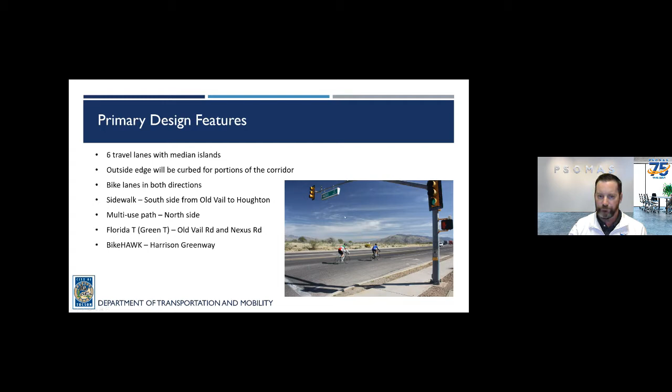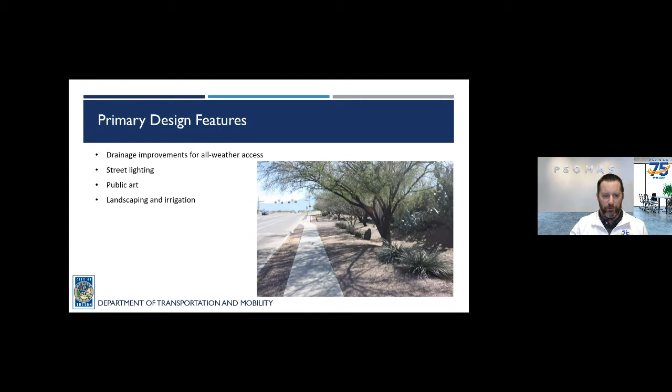We'll include Florida T intersections at Old Vail Road and Nexus Road, and I'll go into more detail on those shortly. There's an existing BikeHAWK at the Harrison Greenway that will be maintained, so there will continue to be a BikeHAWK there in the future. We'll be doing drainage improvements to make sure everyone has all-weather access, and continuous street lighting will be included throughout the corridor. As mentioned, there will be some public art, which we'll talk about shortly, and also landscaping and irrigation.

Here's the Florida T, also known as a green T intersection. The idea behind a Florida T intersection is that, in this case, westbound traffic going from Houghton to Kolb Road would not need to stop for a signal; they would continue through. The only time they would need to stop is if a pedestrian was crossing the road, triggering a signal. Otherwise that direction of travel would be continuous.

Eastbound traffic would have to stop for Old Vail traffic to make left turns out, as well as for Valencia Road traffic to make left turns into Old Vail. However, having the free flow for westbound traffic really improves the operations of the overall intersection. There will be a signal at this intersection as well, including left turn arrows in all directions, as well as a right turn arrow for Old Vail Road traffic going north to eastbound.

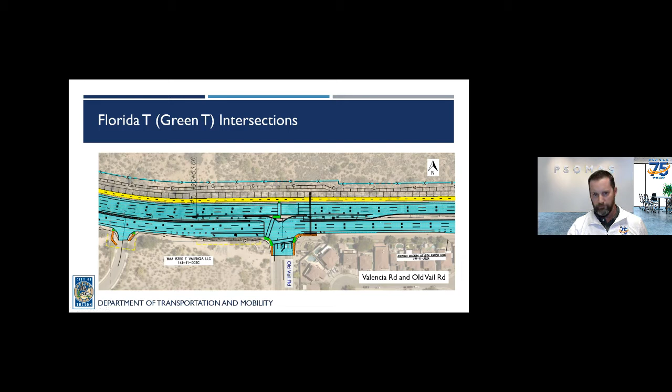Nexus is very similar. Again, westbound traffic would be able to go through without having to stop for a signal unless a pedestrian triggers it. These work basically because there's no opposing leg, no leg on the north side of the intersection. That's why Florida T's work rather well in these situations.

Same situation, there will be left turn arrows in each direction at the signal, as well as a right turn arrow for northbound traffic.

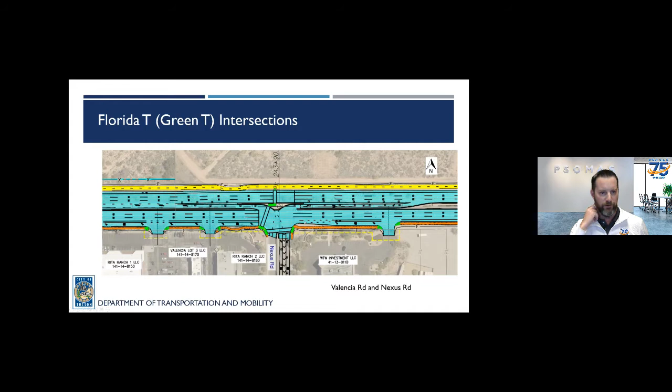We talked a little bit about two-stage lefts last time in December, and we've decided to implement a two-stage left at James Dean, right over here. That allows traffic coming out and trying to turn left onto Valencia to have a staging area where they're out of traffic and able to merge into Valencia when there's an opening.

It's kind of similar to a Florida T, but not signalized or anything like that. It really just gives the driver a place to stage while they wait for that opening to get into traffic.

At Bullrider, we also included what's known as a loon, which allows large vehicles like semi trailer trucks to make a U-turn. This is where they'd be able to do that, since at the Florida T intersections they would not be able to make a U-turn there because of the nature of that style of intersection.

So we have one of these for eastbound traffic, and then we have one for westbound traffic that is west of Old Vail Road.

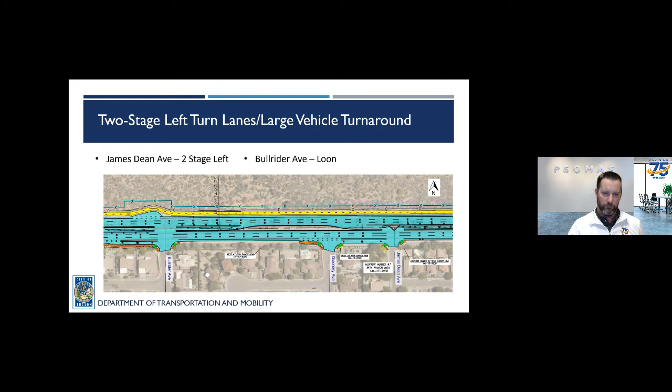This is the landscape concept. Things to note here: the existing landscape on the south side of the road, up against the Rita Ranch development, it's our intent to have as much of that landscaping remain in place as possible.

It's our intent to leave the existing sidewalk in place as much as possible, as well as the existing curb. Everything north of there would be reconstructed and widened. We're doing that because there's some really nice vegetation already out there, and also to save money on the project.

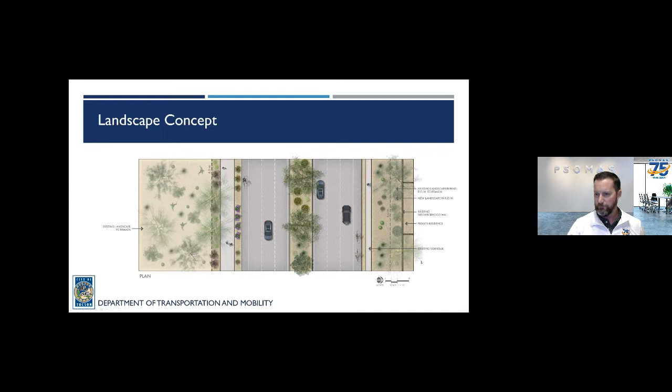And this is what it looks like in plan view. As you can see, we have 6 travel lanes at 11 feet, with an 11-foot travel lane and 6-foot bike lane. There's the existing sidewalk I mentioned, a 12-foot multi-use path on the north side, as well as 11-foot travel lanes and a 6-foot bike lane on the north side as well.

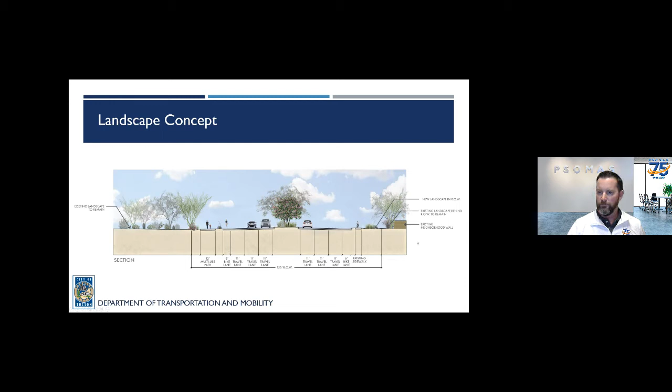And I'm going to turn it over to Woods Fairchild with the Arts Foundation for Tucson and Southern Arizona, who's going to talk a little bit about the process for public art.

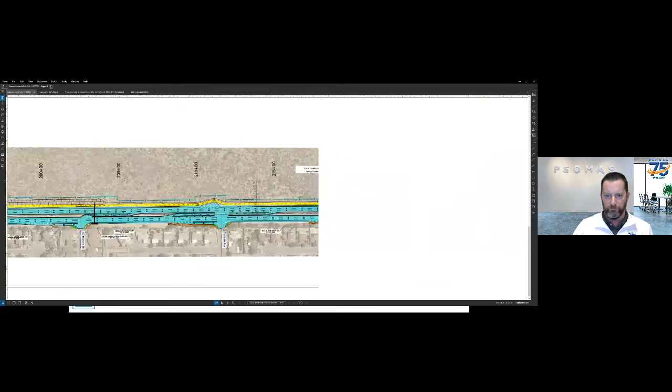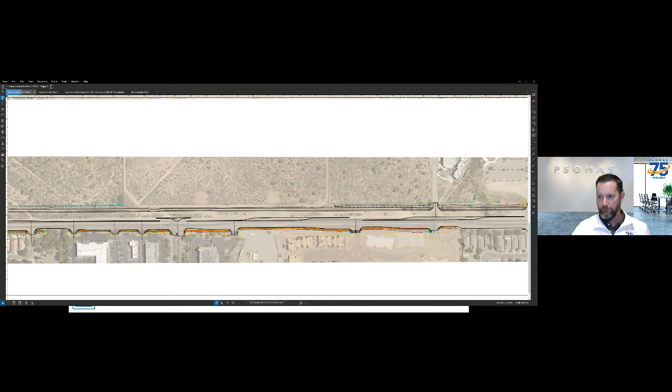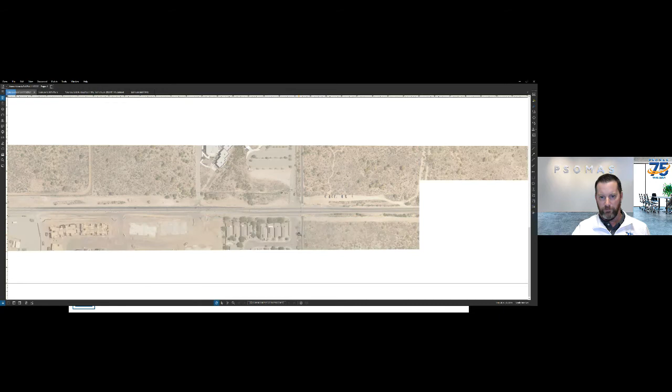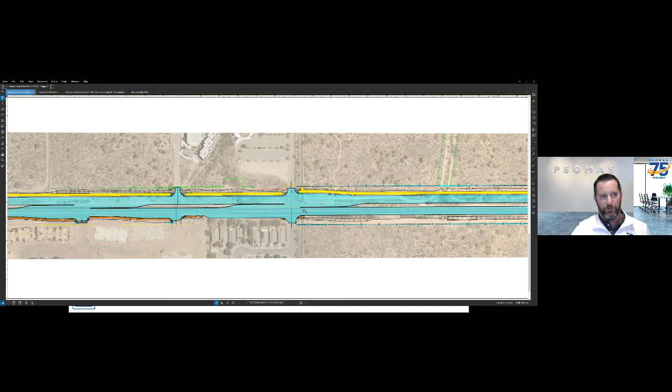Let me share the roll plot and I'll go over to Frost. Takes a little while to update here, sorry, it's been slower than usual. I guess while that's loading up, the answer is yes, there will be a median opening at Frost to be able to turn left out. There will also be a left turn lane going into Frost there.

Here's the Harrison Greenway going north-south. The existing bike hawk is right in this area. Here's Frost Drive, and as mentioned, you will be able to make a left out of Frost Drive to go westbound on Valencia. You'll also be able to make a left into Frost Drive.

There's a lot of trucks now, so the noise level is loud and will only grow louder. Is something going to be done to help the homes on Valencia? We are doing a noise study. The measurements have been taken; however, the noise study is not complete yet, and we have not seen a draft of that yet. Once we do, that information will be shared, but at this point we don't have the results of the noise study yet.

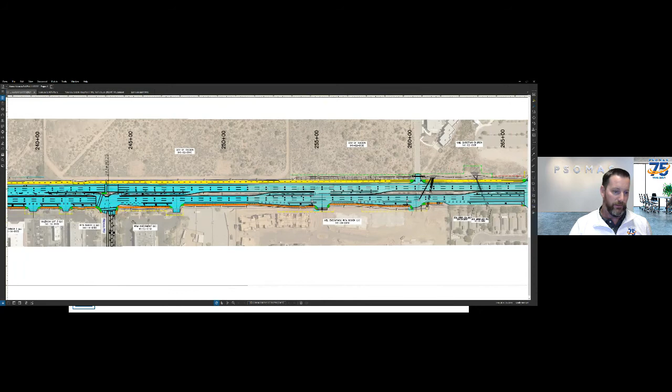The flyer noted improved asphalt surface. Will this result in lower road noise for residents? We will be using an asphalt called terminal blend. It has some rubber in it, which does tend to help with noise a bit. It is not the older rubberized asphalt that was used for a while, because that proved to not have the longevity and required a lot more maintenance. So that is not the case, but it is a terminal blend, which does include a little bit of rubber that helps a little bit with noise.

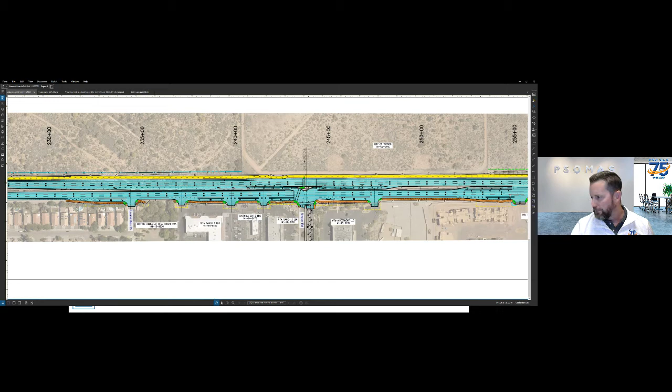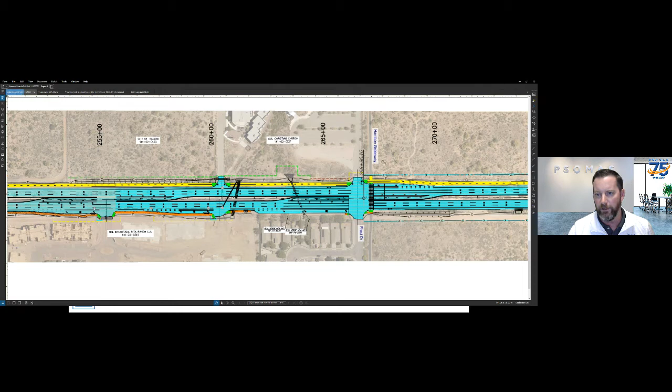Next question, also in regards to Vail Christian Church: I understand that additional frontage will be utilized by the new road. Will safe access be provided for users to pull off the road and unlock gates safely? What type of vehicle size are you planning for this effort? We did measure this, and I believe we still had at least 20 feet between the edge of the road and the gates, which would be adequate for a passenger vehicle. Hopefully that answers the question.

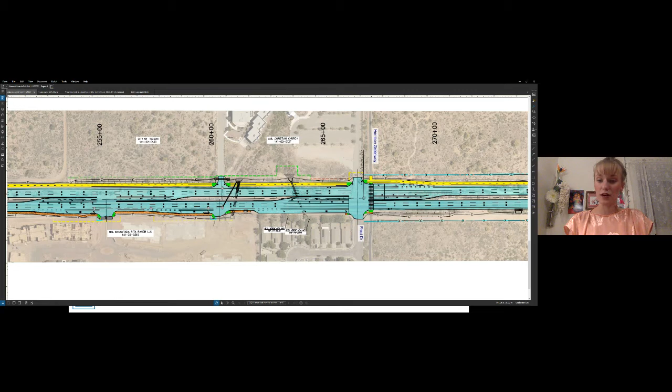Thank you, Jan, for your input and for asking that question. In terms of selecting the committee, my guess would be early 2022, within the first couple of months, as the call will go live first. It will then be open for a full month. Processing applications and getting the panel assembled will be next, along with outreach. So, early 2022. Jan, feel free to reach out, I've put my email in the chat. I'd love to hear about your connection to the area, whether you'd like to serve, or if you have others in mind.

All right, next question. I apologize, I missed the beginning where traffic control is mentioned. Will there be any additional traffic signals, or will we have the bike crossing at the Loop, Nexus, and Harrison Greenway? No additional traffic signals. The existing traffic signals at Old Vail and Nexus will be upgraded to Florida T intersections, and the existing bike hawk at the Harrison Greenway will be widened to accommodate the new roadway width.

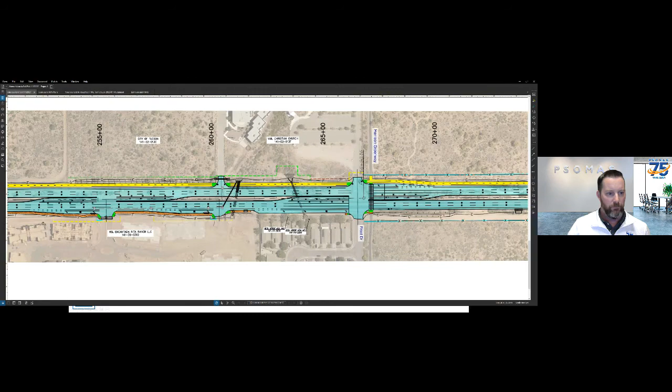Next question: will those living on Arizona Madera Drive in Valencia be able to exit left onto Valencia Road? Let me open up the exhibit again. Arizona Madera is over at the right end. So at Arizona Madera, we are planning to have a left in, a right out, and a right in. We did not include a left out because you can actually get over to Old Vail Road and go out that way to make a left onto Valencia. We think that's a safer movement than trying to exit onto Valencia here.

Was the noise study done after the completion of the bridge or before? Traffic significantly increased since the bridge east of Houghton was completed, and with the return of many to daily commuting after COVID work-from-home. The traffic study was completed after, and the noise study was also completed after the bridge work east of Houghton was done. The noise measurements were taken last month, and the study is being done right now, so it would be after that work was done.

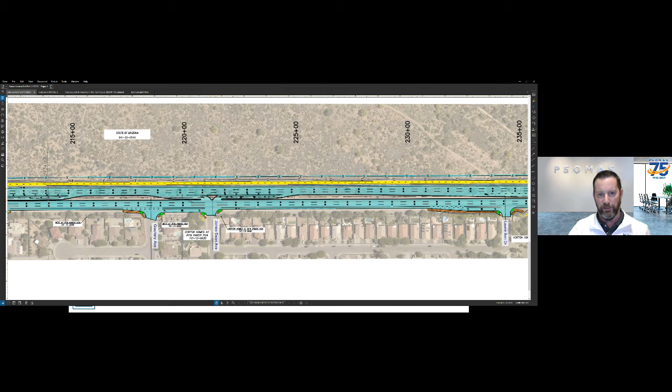Next question: the run-up going westbound out of James Dean looks pretty short. Will it have a light? It will not have a light; that is an unsignalized intersection. The idea is that you pull out, and this becomes your waiting area for an opening in traffic, then you pull in and continue on to the west. We feel it's safer than not having the two-stage left, where folks tend to pull out and end up hanging out into the eastbound lanes with their tail end often still in there. So it gives a safe area to wait while you make that maneuver. But it is not intended to be an acceleration lane—it's really intended as an opening, and when it's open, you make that maneuver.

You said you were doing a noise study. What are you looking for, excessive noise areas? So for the noise study, we follow the RTA's noise study requirements, taking existing traffic noise measurements, calibrating the model, and forecasting traffic noise 20 years down the road. If the noise meets certain criteria, including how loud it is, and is feasible and reasonable to mitigate, then mitigation walls will be built. At this point we don't know the results of the study yet, but that's the short version of the process.

Will this meeting's recording and presentation be made available? It looks like that one's already been answered - yes, it will be recorded and made available on the website.

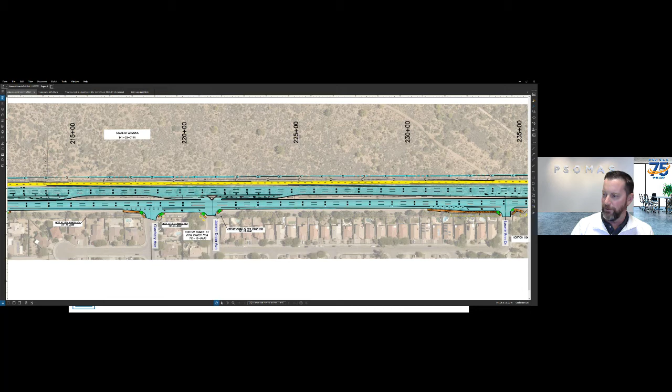Who pays for removal of Florida T at Old Vail when the state land department sells the land? The land north of Old Vail and Valencia had been looked at for a high school site for Vail. I think this would be a good question to introduce Bob Roggenthien, the city's project manager, and let him take that one.

Kevin, you're gonna have to reread the question. Who pays for the removal of the Florida T at Old Vail when the state land department sells the land? The land north of Old Vail, Valencia, had been looked at for a high school site for Vail. Currently, and I believe in the future, that particular land is leased out to Davis-Monthan Air Force Base, and there's a number of limitations to that land. So what happens is usually the developer, if it is sold, picks up that cost to remove and rebuild a signal at that location.

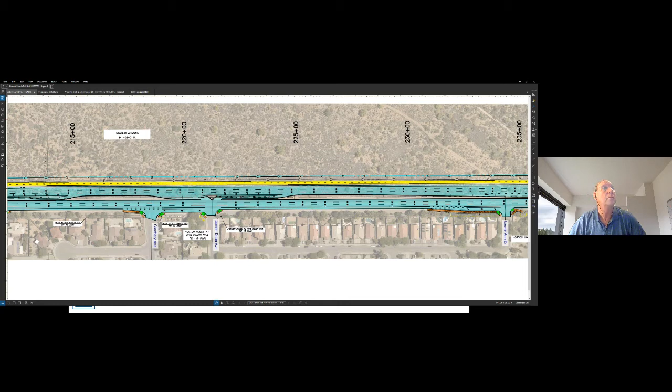The next question is, how will you solve the ponding at Valencia and Old Vail? Let me get over to Old Vail. So we are regrading the intersection a bit to help with the ponding. We're collecting water that's coming down Valencia in a catch basin before it ever gets to the intersection, and then it'll go north across the roadway into a proposed channel that carries the water down and outside of the project limits. We looked at that very carefully - it came up early in the design process as a concern, and we are addressing ponding there at Old Vail and Valencia.

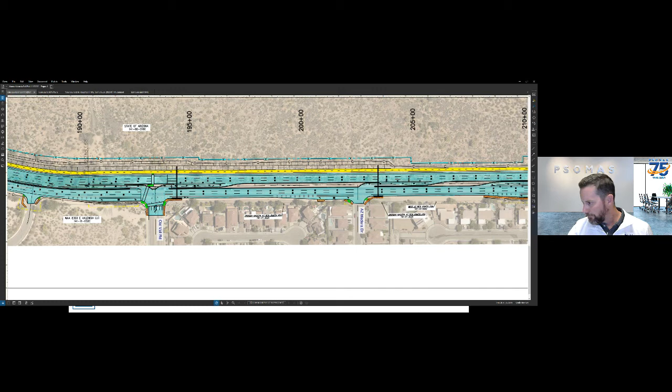Next question: will the streets be lit similar to Houghton, on the sides of the road or in the middle? Can we ensure the lights all have shields so they aren't coming into the residential neighborhood? The street lights will be on the sides of the road, not in the median, and we have discussed adding shields to the lights on the south side of the road so they shield the residents there from the light. So yes, those will be included in the project.

How can I give input on art if I live in this area, go to school in this area, own a business in this area, etc.? We talked about the art survey, as well as contacting Woods if you're interested in being on the arts panel. Woods, is there anything you'd like to add to that? All right, oh that's great. Thanks.

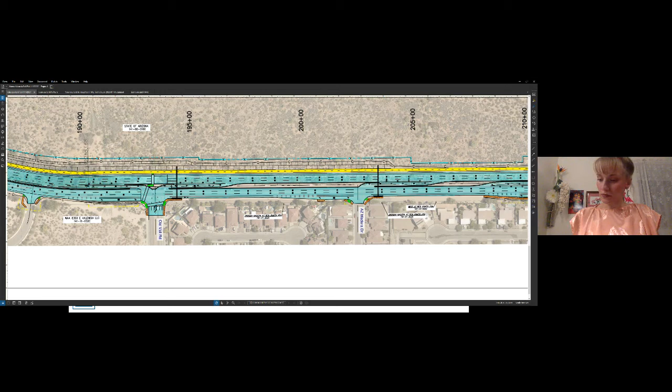I believe that is all the questions we've received so far. Let's give folks just a minute here to see if anything additional comes in.

How will you solve the ponding at Valencia and Old Vail intersection? I just went over that - we'll be catching the water before it gets to the intersection and taking it north into a channel and then outside of the project limits, and we're doing a bit of regrading of the intersection to make sure that ponding won't be an issue there.

All right, we still have a few more minutes if anybody has questions.

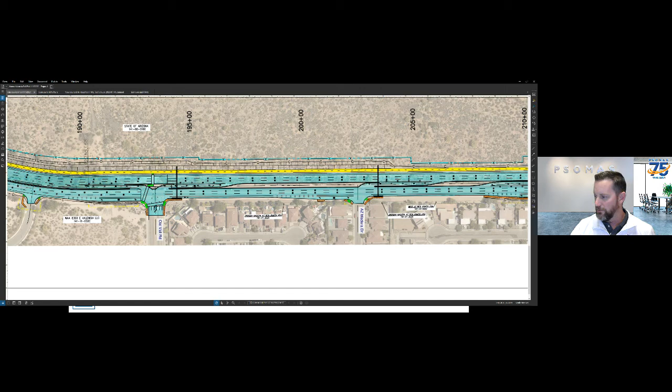Is there anywhere to perform a U-turn on this length of road? You're correct, you can't make a U-turn at Old Vail. However, we are making accommodations for a U-turn at Bullrider, including accommodations for large vehicles - this is kind of known as a loon. It would be coming out here, and those larger vehicles, including semis, would be able to make a U-turn and head back that direction.

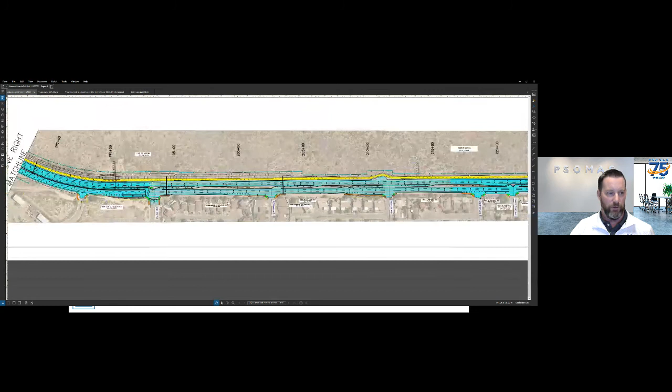Going the other direction, there is a similar opening to the west of Old Vail, and then east of Nexus there are several locations to make U-turns, including at this location - this is where the new apartment buildings are. You'll be able to go left into the apartments, left out, as well as make a U-turn. And then at Frost you can make U-turns, as well as locations east of Frost.

What is the time duration for serving as a public art panelist? Woods, do you want to take that one? Yeah, great.

The duration for serving as a panelist is definitely different for every project. It's definitely a commitment to be on a public art panel, as it is more than the artist selection phase - you continue to serve throughout the whole design phase. That's the piece that can really vary and is a very exciting process to be part of. However, it's important for folks who might be interested in serving on a panel to really think about your availability and the time commitment that it requires, and it can very much vary from 6 months to a couple of years, however long it takes to reach the final design. Thank you.

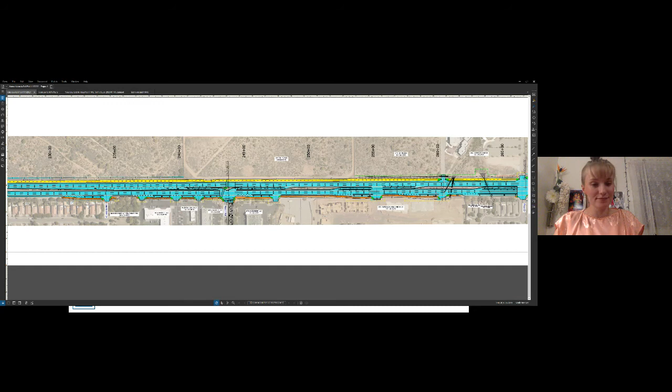I was reminded that we will be including speed feedback signs on Valencia. Those are the signs that tell you what speed you're going, and they have been shown to keep traffic speeds a little bit lower, so those will be installed on this project as well.

Let's see if any other questions have come in. Not yet. We do have a few more minutes for questions if anybody has anything. Bob, is there anything you'd like to mention that maybe I missed or forgot to discuss?

I think James reiterated that through the residential areas, we may be reducing the speed limit to 45. Correct, yeah.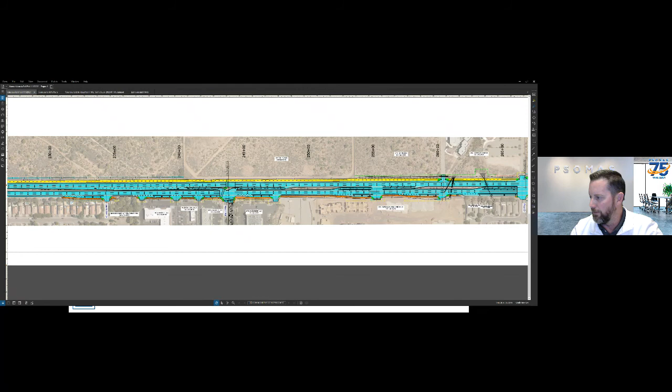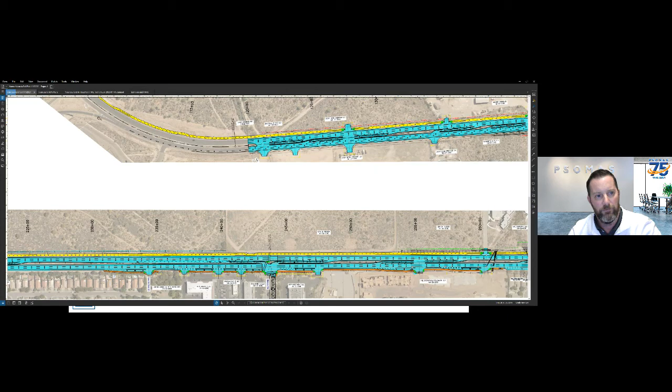Currently, we merge into Valencia from the road next to Amazon just before the Goodwill building. Will that now become the far right-hand lane as part of 3 lanes? Let me zoom over there. Yes, that is the case. You can see here the far right-hand lane is this one, and it will turn into the far right-hand lane of the 3-lane section.

When do you anticipate starting this project? How's the timing compared to the widening of Houghton north of Escalante? This project is anticipated to begin in 2023, and the widening on Houghton north of Escalante is anticipated to begin in 2024. There will likely be at least a little bit of overlap between the two projects.

Is the bike crossing of Valencia Road from Fantasy Island going to be maintained? Yes, I believe you're asking about the Harrison Greenway and the Bike Hawk. That will be maintained as part of the new project.

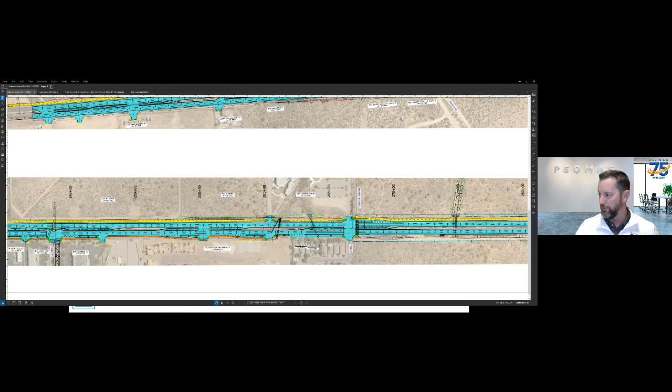How does this project connect to Houghton? Houghton was widened several years ago, and so we will be tying into that widened intersection approximately 500 feet west of the intersection. We'll be tying right in, as you can kind of see where the blue ends here. This was all done previously - we'll be restriping a little bit, but other than that, the intersection was completed a few years ago.

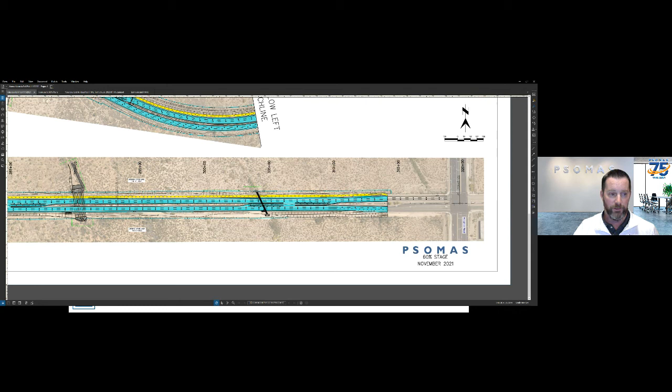Do we anticipate that the traffic impact will be similar to the Houghton project? I'm going to assume this question is about during construction. There will be traffic impacts, as there always are during construction projects. We'll do our best, but the nice thing here is that we're planning on leaving the existing roadway in front of Rita Ranch in place, so traffic can travel on that road while the contractor builds the new half of the roadway to the north, and then move traffic over. That should make things easier during construction.

Will there be another public meeting for this project? I believe there is another one planned. There are certainly at least the art-related ones that Woods mentioned, and I believe there'll be at least another public meeting before construction on the project overall.

In other words, during construction, will it be a 1-lane dirt road? No, generally we require the contractor to maintain the paved surface for any extended periods of roadway construction. So you should have 2 lanes, or at least 1 lane in each direction, on a paved surface during construction.

There was a neat bench with a decorative shade structure on Pantano Road. Would that classify as art? It's by the bike path, Fantasy Island, and Greenway. Woods, I'm not sure if you know whether that location is a public art piece or not.

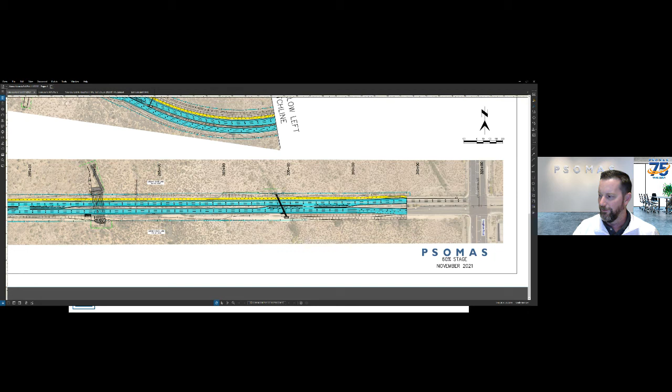Which Greenway? There's a neat bench with a decorative shade structure on Pantano Road — would that classify as art, if it's by the bike path, Fantasy Island, and Greenway? Oh, I think they're asking, they like the bench with the decorative shade structure on Pantano Road, and they're asking if something similar could be installed at the Greenway in Valencia. Hopefully I got that right, whoever asked the question. I think that's what the question is.

Sure, I can speak to that. Public art can show up in lots of different ways — it can be a standalone structural piece, a mural, integrated artwork as designs on the side of a bridgeway, or interactive. That can include artistic amenities or artwork intertwined with existing amenities like public seating, benches, picnic tables, things like that. I'm glad you enjoy that piece there, and something like that could absolutely be part of the public art process.

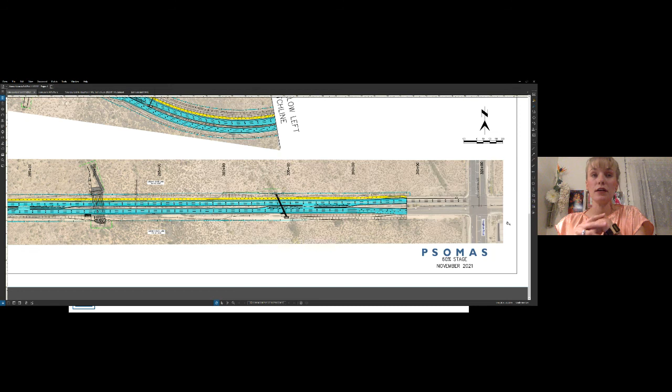Also, public art works in collaboration with the community. If a public art piece goes up, for example in a new park area, the community can also vocalize if they have interest in adding benches near the artwork, things like that. That conversation can absolutely take place. Thanks for asking that great question — love to have public seating.

All right, one second, my light went out again. All right, next question, more of a statement I believe for Ms. Fairchild. The Rita Ranch Neighborhood Association has put out the word asking for people interested in being on the art panel. So far we have 4 people interested, and I'll send those to you later. Fantastic, thank you so much.

Next question: will there be additional Rita Ranch monument signs in this area, or would that be art? No additional Rita Ranch monument signs are planned as part of the project. By monument signs, do we mean artistic roadway signs identifying that you're entering the Rita Ranch neighborhood, like walls that have Rita Ranch on the side of them? Right, totally — something like that could absolutely come out of a public art process.